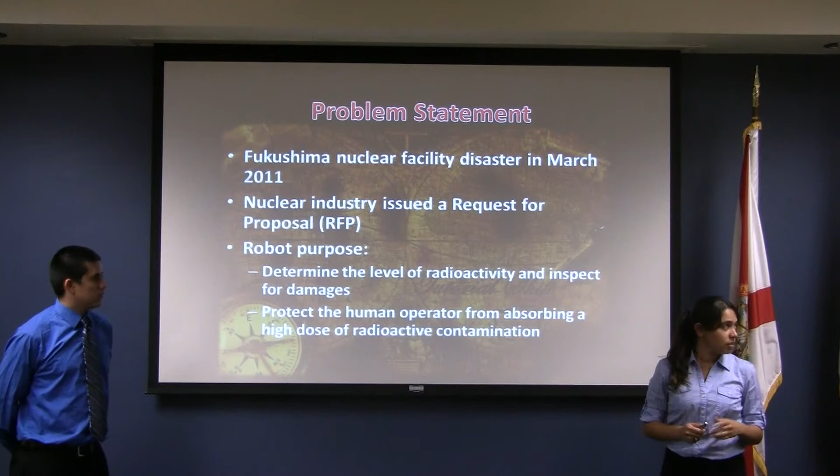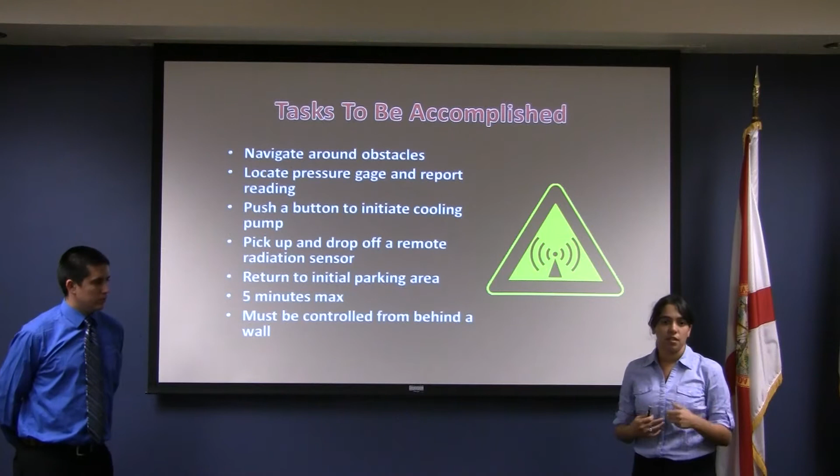Some of the specifications required for the competition are to navigate around obstacles, locate the pressure gauge and report the reading, push a button to initiate the cooling pump, and pick up and drop off a radiation sensor. All of this has to be done within 5 minutes. And the operator is behind a wall, so they can't see the layout of the competition.

And now I'm going to pass it on to Sebastian, who's going to talk about the design of the robot.

So I'm going to talk about how we went through several different stages in our design. I'll cover the main characteristics of each design, some of the setbacks, and what we did to improve on each certain design.

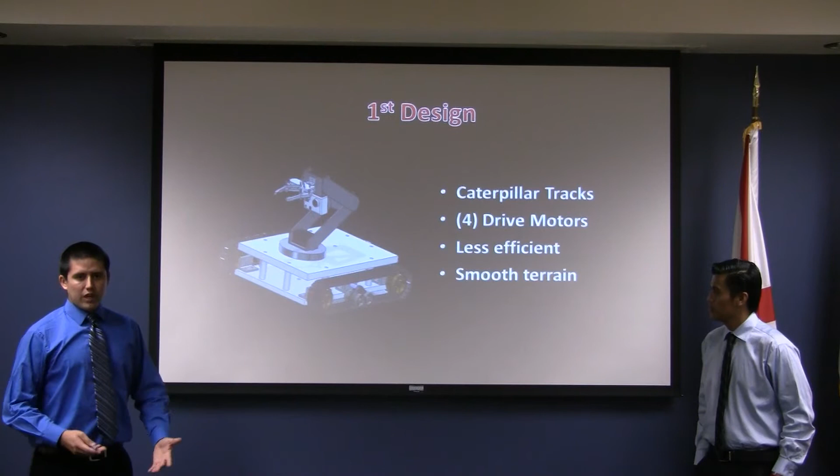This is our first design, which you can see in our poster. Originally it had caterpillar tracks. This design proved to be very inefficient. It requires 4 motors, so it needs more energy. We found out the terrain was going to be very smooth, we didn't have to navigate over any kind of rough terrain, so there was no need for that kind of system with the skid steering.

So our second design was a pivot steering system. It has 2 drive wheels and 2 caster wheels in the front, and the arm. In this design, the arm was not strong enough to hold the camera, which is how we initially intended it to use.

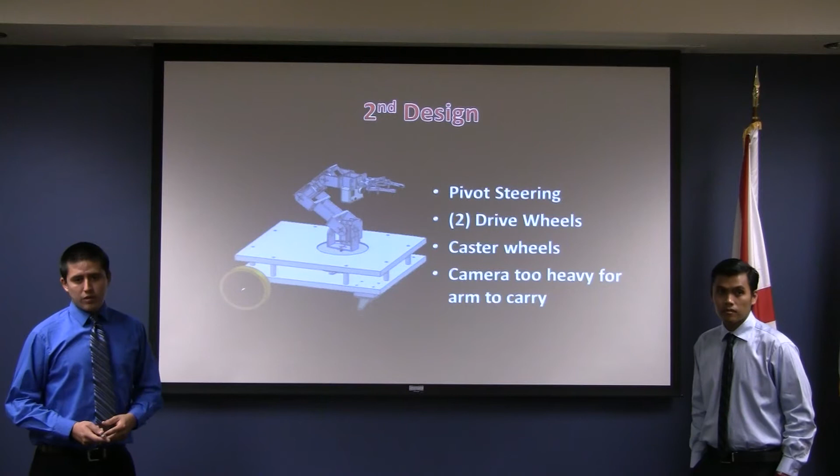So for the third design, we incorporated a separate pan and tilt system for the camera, and had to modify the chassis for that. But the downside of this design were the caster wheels. The caster wheels made the steering very unpredictable.

Let's say you had just made a right-hand turn and wanted to go straight. In the time it took the caster wheels to settle, you would send your robot in a different direction. So you were constantly having to make corrections on it.

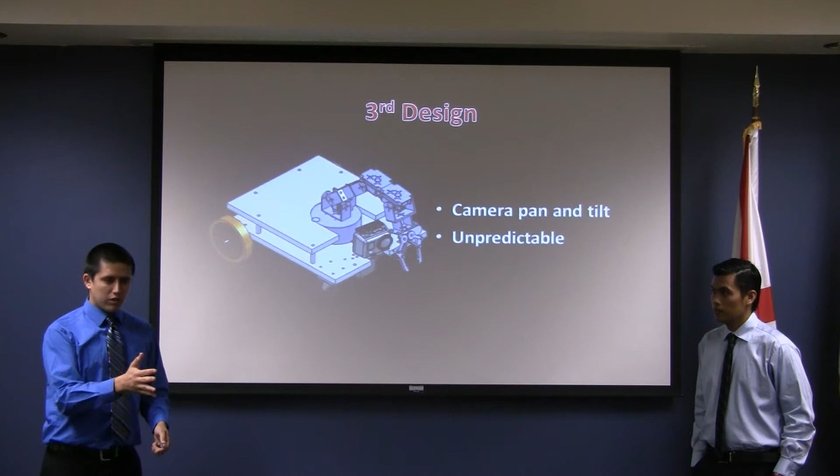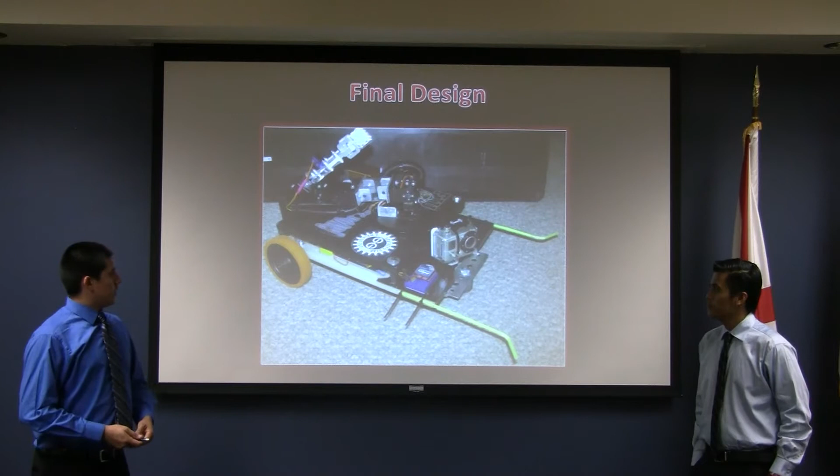So this is our final design, which is what you see in front of you right now. We manufactured the chassis base out of a cutting board, and I'm going to go into a little bit of detail about each of the main components.

What we use for the steering is a ball caster, and the benefit to this is it has no input on the steering. The ball caster is big enough, it's a 1-inch ball, so it's big enough to navigate over any kind of irregularity in the surfaces.

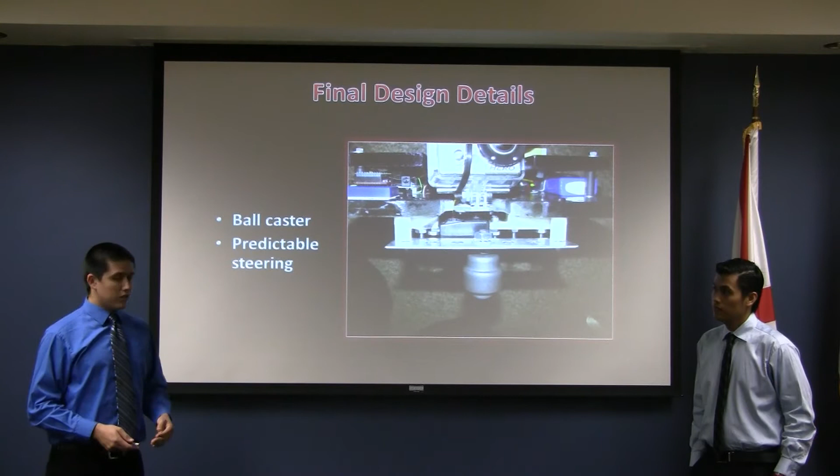And this is the pan and tilt system that we used. As you can see here, it's just a motor, a servo that's in the back of the GoPro case with the wire hanging onto the chassis, and every time the motor moves, it tilts the camera up and down.

This servo on the bottom serves as our pan, and we had to make special spacers for it so that the camera was low enough that when the arm reached over it, it wouldn't interfere with the arm, but it couldn't be too low where the case of the camera would interfere with the bottom plate.

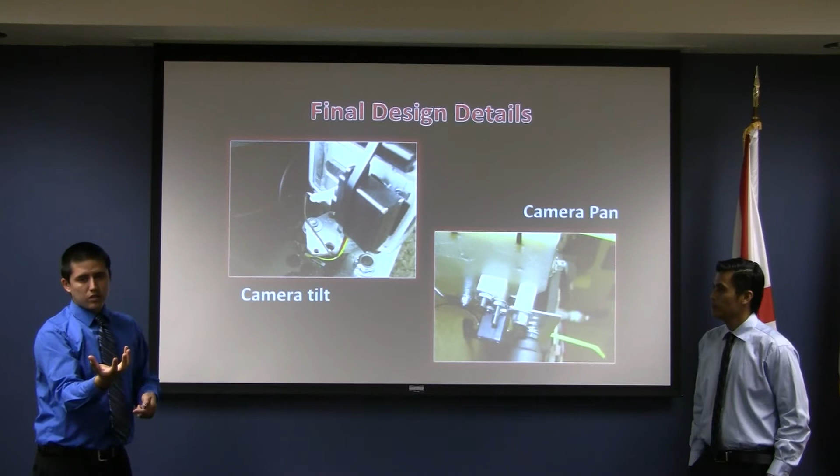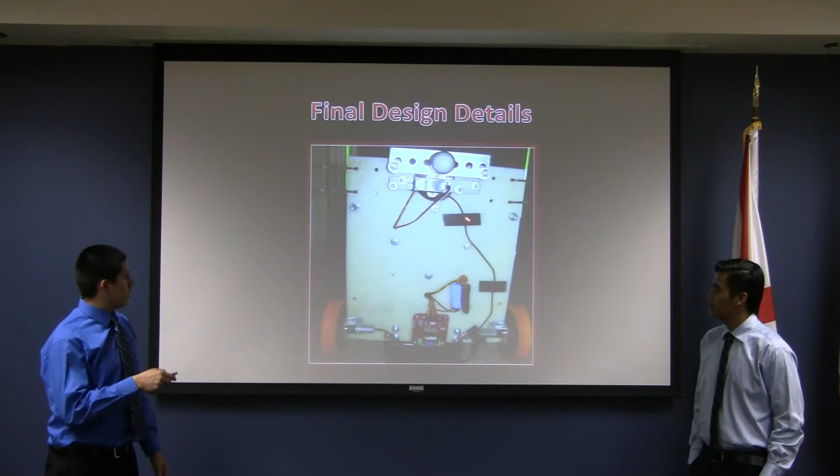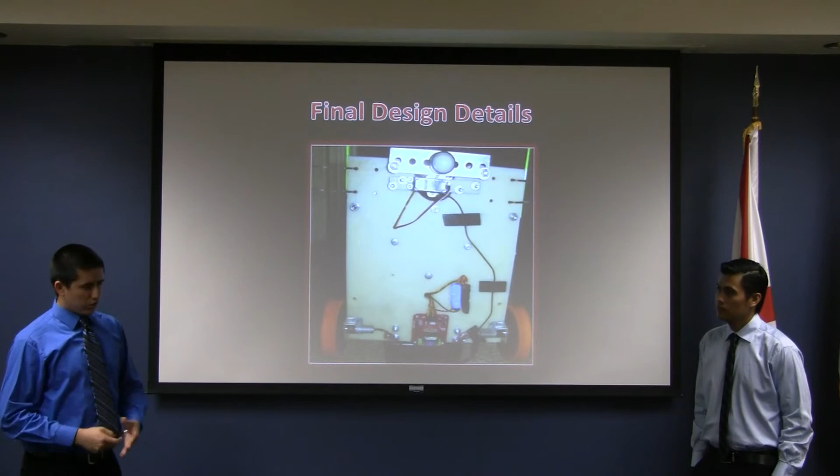So this is what the bottom of the robot looks like. As you can see here, you have the communication wire and the video wire. This is a switch regulator, and we had to put it at the bottom because it was causing noise, creating interference with some of the video system and the communication, so we tried to isolate everything as much as possible.

So a little bit of detail here. You've got the motor controller, which allows the drive motors to go forward and back. This switches the voltage, the polarity of the voltage with our input from the microcontroller. And here you can get an idea of how big the motors are. They're very small, which actually ended up being one of the downfalls of this project, but I'll go into that in a little bit.

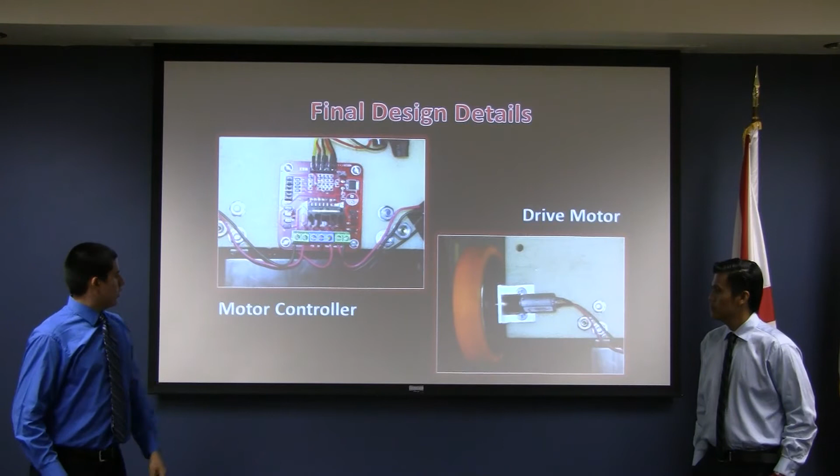For the communication, we decided to go radio frequency. We were originally going to use Wi-Fi, but in order to incorporate the global learning aspect of this project, we used radio frequency instead, and it actually ended up working very well in our favor. A lot of the teams that competed, their biggest downfall was Wi-Fi, there was a lack of it. This alone allowed us to place high in the competition.

And then for the video receiver, as you see, what it used to be was a beer cooler, and we modified it. We gutted it all out and put all the components. You got the battery, you got the receiver, you got the switches, and this is the video transfer. So very neat, very nice looking.

There's a lot of nods. We've got a lot of nods at the competition for that one. Piggyback on the back of the robot is the switches. Each switch controls a different battery, and as required by ASME, we need to have an emergency stop button.

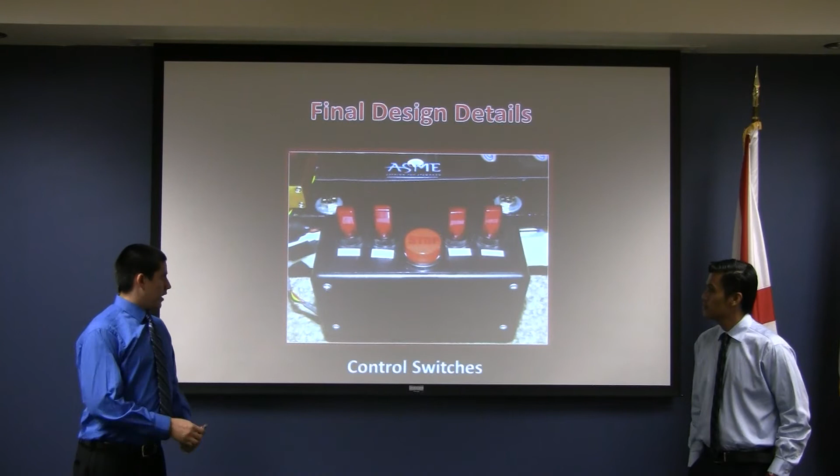And now Ryan is going to speak about the robot arm in this construction.

All right, good afternoon. I'm here to discuss the principle that we applied for the robot arm project that we did. On the left side of the screen, you see this robot arm gripper that we attached to the robot arm. It consists of polycarbonate material right here, and we attach anti-slip material in order for it to grasp materials firmly. And on this side of the screen is the arm links.

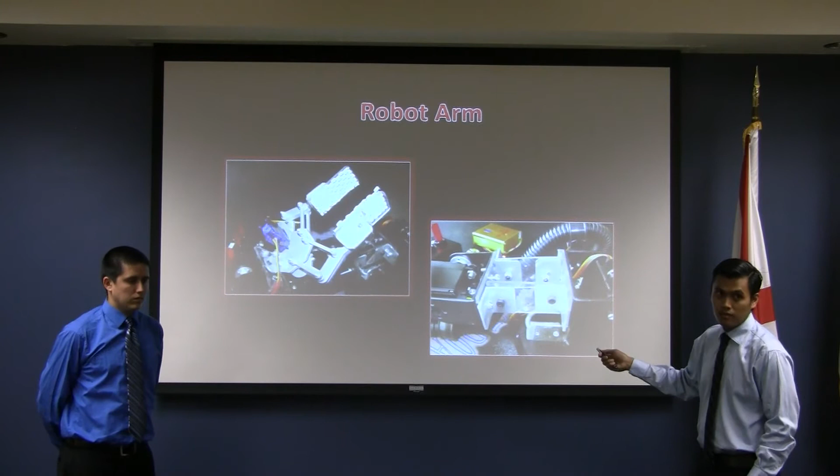We built it like this with aluminum brackets and with polycarbonate materials as well. We attach some fasteners in order to secure it firmly. The robot arm basically consists of 5 servo motors, excluding the base and the vehicle itself. Attached to it is a prefabricated claw, as you've seen in the previous screen, with a modified gripper on it. In order for us to make this possible, we have to use lighter materials such as aluminum and polycarbonate plastics.

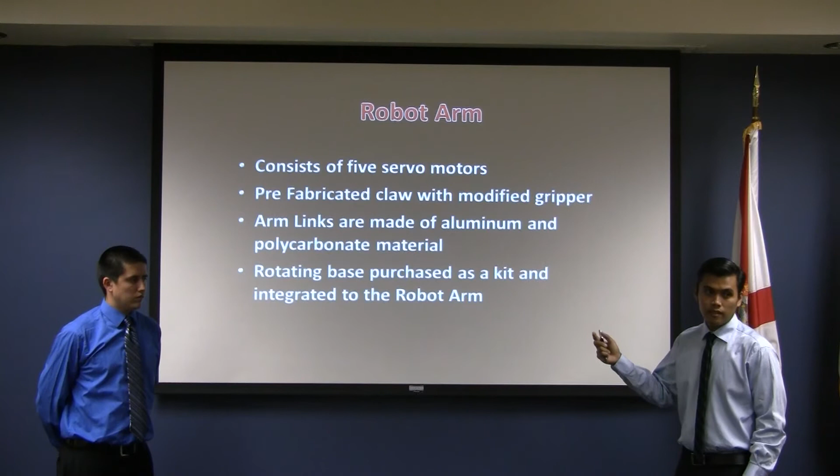The rotating base that we attach to the robot arm allows it to move 180 degrees. We use a kit available, and we have to assemble it and incorporate it to the robot arm in order for it to use it.

All right, for the motor selection, we need to do this correctly, so we have to find out the amount of weight it has to carry, and because of the initial designs that we have the heavy components, we keep the heavy components such as motors as close to the robot arm base as possible.

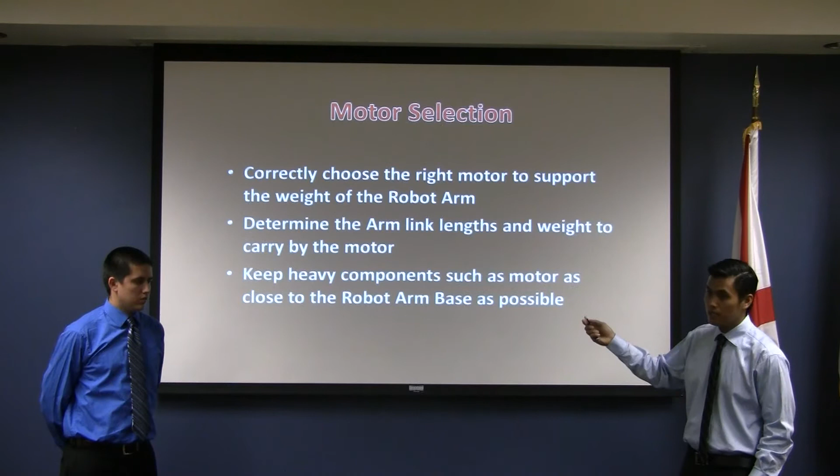As Sebastian mentioned earlier, in the initial designs that we have, the camera itself is attached to the robot arm, which is proving hard and difficult for the robot arm to move because it's adding weight for the robot arm to be moved on it. So we have to change our design and attach the camera to the base of the vehicle with its own servo motor to have it pan and tilt down.

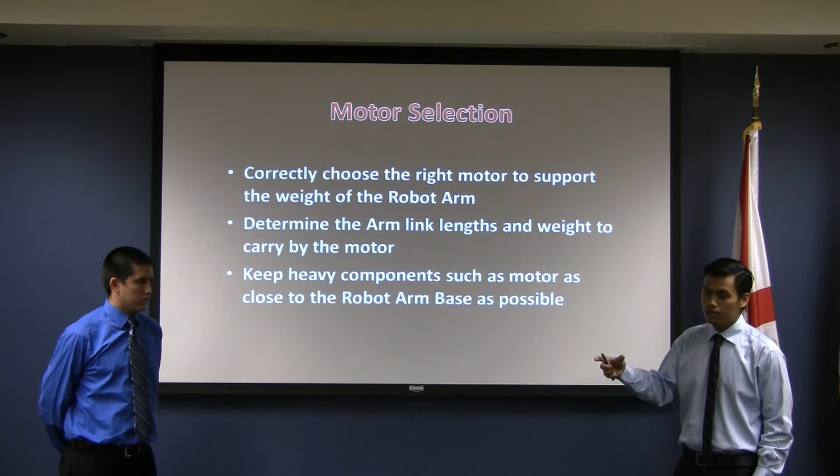All right, and I'm passing it to Maribel to discuss the program.

What we did is we made preset positions, and this helped us save time during the competition. So we have one to pick up that would lower the arm close to the ground and open the claw. So then we just have to do minor adjustments to be able to pick it up.

Then the travel position would retract the arm, but leave the sensor and the end of the claw in view of the camera, so that just in case it falls or anything happens, we can quickly see it because it's in view, and then just pick it up or anything.

When it's ready to drop off, there's a drop off position that drops it low to the ground, and then you just press the open and it releases it. This is good so that we don't break any sensors in case it's very sensitive and so forth. And then the home position to just get it out of view, retract it completely, when we're not using it. And there's a few for the camera as well.

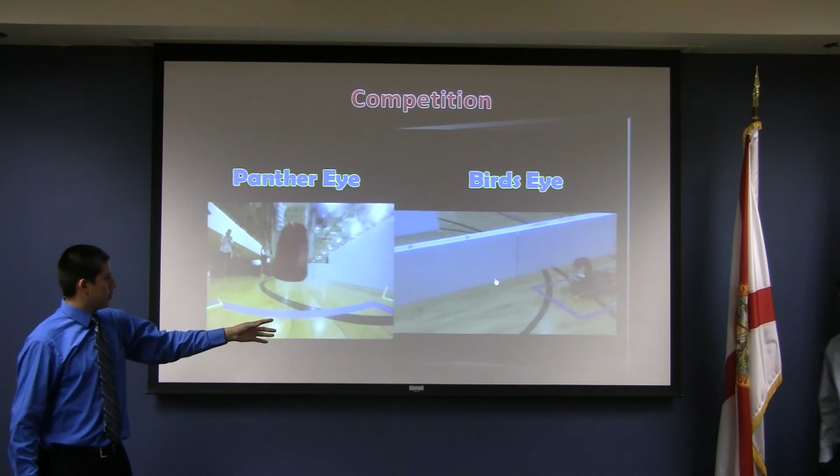Okay, so this is a video of our competition. On the left-hand side, you're going to see what the operator was seeing just at the beginning of the competition. So you started off with the sensor, and this view wasn't as clear on the control room, which was totally isolated.

The drivers, before the competition even got set up, they were isolated. Cell phones were taken away. So the operator had no idea what the course looked like.

This was done on a basketball court, and these lines look very easy and very clear right now, but through the video transmission, you get a little bit of fuzz. It was hard to see where the boundaries were.

Right now it's being put into the drop-off position, so as you can see, the claw came and brought it close enough. You want to make sure you don't just drop it, because if the sensor falls off, then you won't get points for it. By the way, this video is not real time.

It's sped up about 2.5 times, so just picture everything going a little bit slower. This is the sensor that we had to pick up.

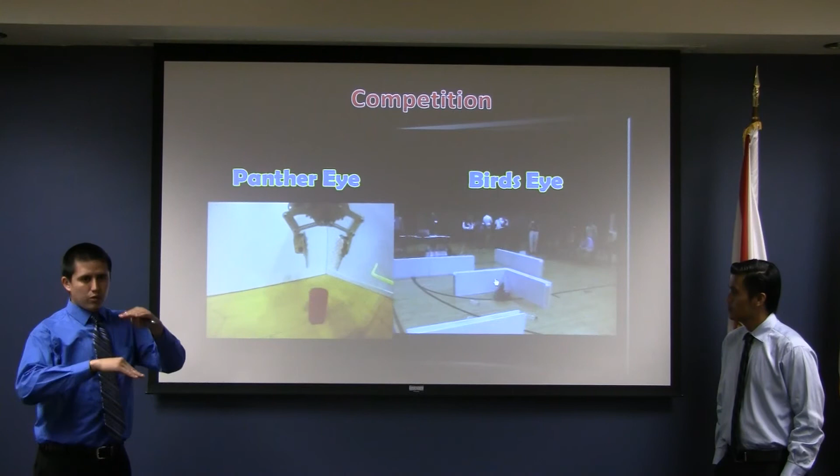This competition was said to have been one of the hardest ones. If you look at videos online of other competitions in other districts, the walls they had were just like a little 2x4 or something. So a lot of teams created a camera that was higher up so they could see the overview of the whole competition, but this advantage was not possible here. I didn't see any videos in the competition where they had water bottles or a towel put in there somewhere. So there's a lot of things that can snag up teams, and it caused a lot of issues.

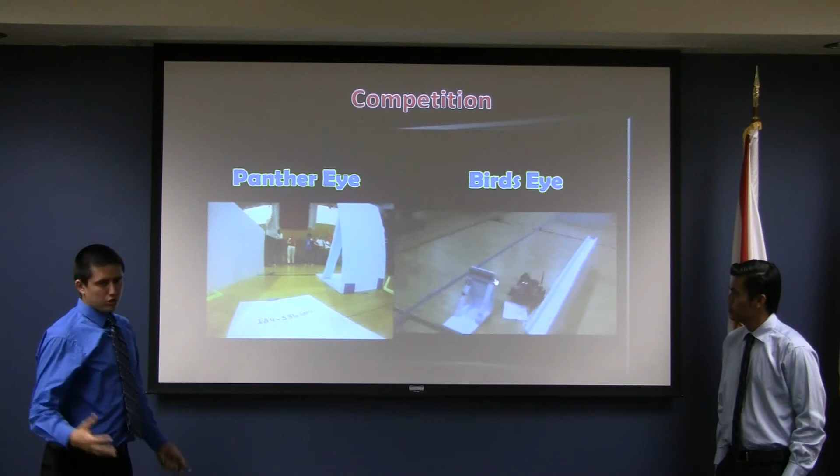So right now the sensor got picked up, and now we have to go and read this gauge. All we have to do is report that number to the judge that was in the room with you. They didn't tell you if it was right or wrong, so if you didn't have good camera feed, you wouldn't have been able to know if you got it right or wrong.

As you can see, there's the towel I was talking about, and here you're going to see the button that we had to press. You just have to touch the button, and as long as you touch it, they give you the okay, they beep it, and you were good to go.

But going back to some of the obstacles in the competition, a lot of teams decided to use a sweeper arm movement to pick things up, and a lot of these obstacles, the towels, or especially the water bottles next to that sensor, were getting in people's way quite a bit. So it definitely made it a tough competition.

Here in the video, you're going to see I kind of go back and forth quite a bit. I was having some lag in the video, so I held the turn button for too long. And this is coming back to the starting position.

There were 30 teams that competed in total. The average team member count was 8, that's how many people a lot of teams had. The University of North Carolina, who was posted next to us, had 18 people on their team and they couldn't finish the course. So it's a testament to what we did, and we did something right.

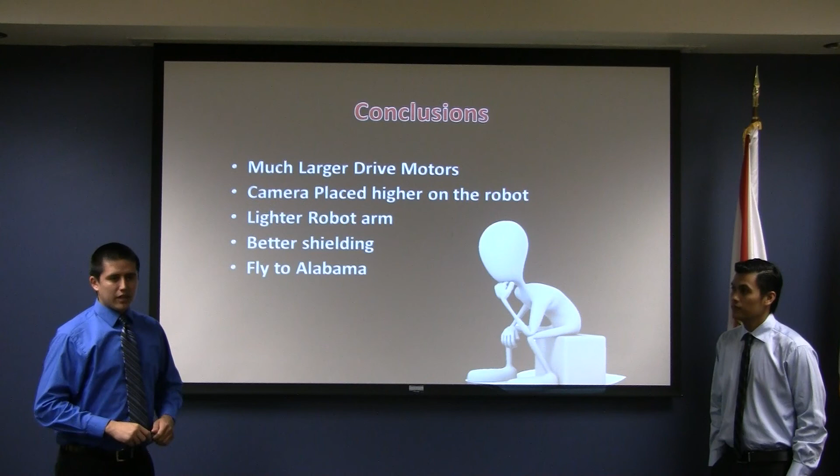And next time, we're not going to drive to Alabama, we will fly to Alabama. That was a long drive.

So we put a lot of effort into this project, and a lot of work into it, but none of it would have been possible without Southern Gear. They were a great help backing this whole project up, and also, of course, Melissa, our advisor. She was there to answer all our emails late at night, and we would get very detailed responses from her, so she shared a lot of her knowledge with us, and definitely made this project smoother for us.